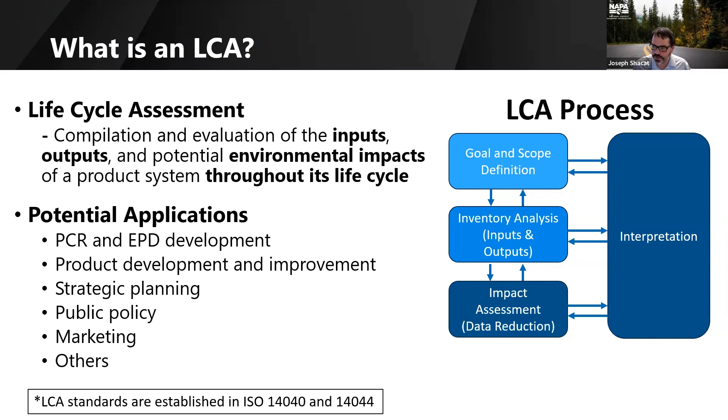So what is an EPD? The EPD is the Environmental Product Declaration. The best way to think of this is a standardized LCA report, where it's designed to enable comparisons between products that fulfill the same function. Now, remember my analogy there with the shoes? That was not an EPD because I really can't compare that pair of shoes' carbon footprint to some other pair of shoes' carbon footprint because it's not standardized, unless I'm looking at one pair of ASICS to another, for example. So that's one of the differences there.

EPDs also report a number of impact categories, not just your carbon footprint. So we'll get into that later on in this presentation. And EPDs are also independently verified. I didn't see anything in the ASICS methodology that showed that their calculations have any sort of verification. So that's an example of the differences that are out there. One key thing about comparing EPDs is you should not be comparing EPDs across different product categories for a lot of reasons. But as we go into this a little bit more, I think you'll understand why that's important.

So what is the PCR? The PCR is a set of product category rules. This essentially sets the standards, the rules, requirements, guidelines for developing EPDs for one or more product categories. So in our industry, we have two really key PCRs at this point in time. One is the core PCR for construction products and services. That covers all construction products and services. It's ISO 21930.

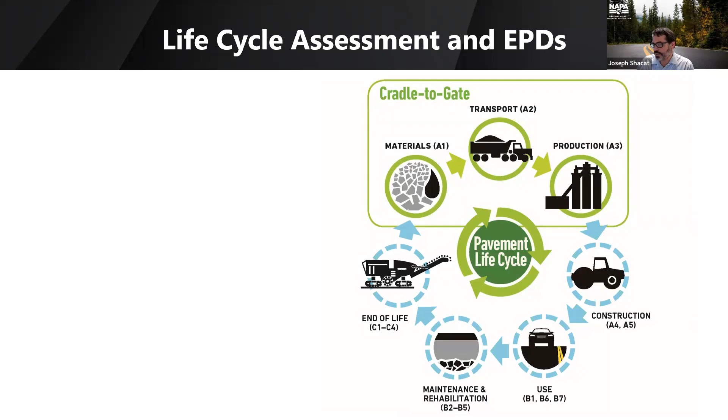Now, let's look at the life cycle assessment aspect of things. These are all the life cycle stages of an asphalt pavement, starting with raw materials, extraction and processing. This could be things like mining aggregates and crushing them, screening them, pulling petroleum out of the ground, refinery operations, asphalt binder terminal operations, all that sort of thing. That's all materials. Getting those materials to your plant, that's the A2 stage, and then plant operations is the A3 stage. These are the 3 stages that are included in an EPD with our Emerald Ecolabel software, because these are the 3 stages that mix producers really have control over, right?

Once it leaves the mix producer's plant, it could be sold FOB to a customer who's going to do their own paving operations. The producer often doesn't have control over what kind of road it's going to be on, how that pavement's designed, what the maintenance schedule is going to look like over the next 10 or 20 or 30 years, what's going to happen at the end of life. Those are often in the hands of the pavement owner or some other contractor.

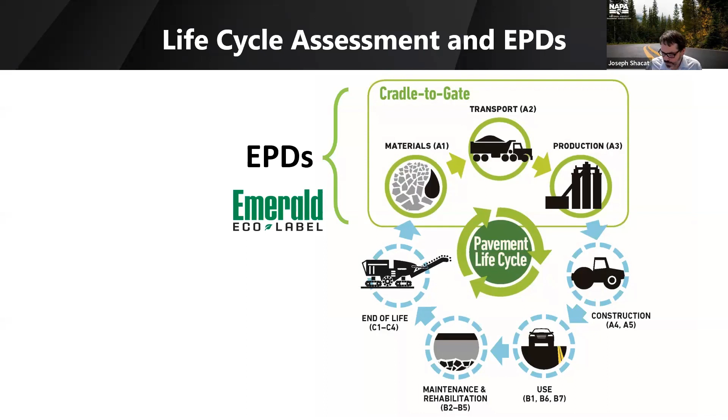If you want to look at those additional life cycle stages, you can conduct a life cycle assessment. You can use your EPD as a data source for that LCA, right? So it's a modular system. So if you're an agency and you want to look at the full life cycle, by collecting EPDs, you're getting really good data for those first 3 life cycle stages from your contractors, from your suppliers, and that sort of thing.

And then LCA Pave is a free, Excel-based software tool developed by the Federal Highway Administration that will do all these life cycle stages except for the use phase. So the vehicle fuel consumption and that sort of thing is not included in LCA Pave. So that's the full life cycle view of an LCA and an EPD.

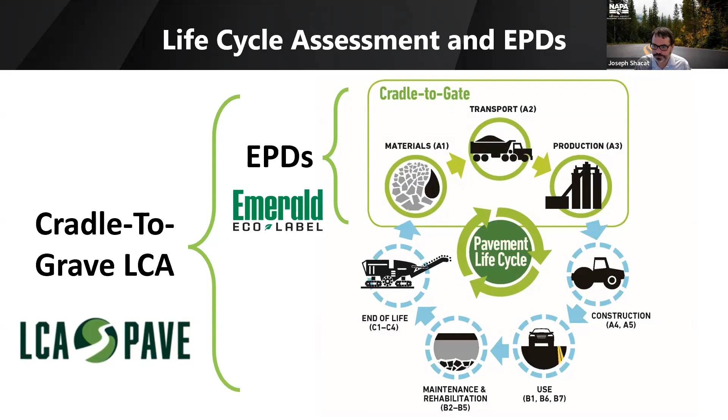So in our EPD program, we have a handful of really important components. One is our general program instructions. These are essentially the administrative rules for the program. We have an underlying life cycle assessment. So the PCR is telling you how to do an LCA to develop an EPD.

If you're going to write rules about how to do an LCA, you have to know what's important. What are the key parameters that matter? What are the things you can ignore? What are the upstream data sets you should be using? So that's all pulled from the underlying life cycle assessment. It's a really important document, which informs development of the PCR. And then once that PCR is finalized, we have a software program that lets mix producers pretty easily develop EPDs for asphalt mixtures that comply with the PCR for asphalt mixtures and all the other standards that PCR is compliant to as well. So that's the overall program in a nutshell.

Okay, so let's take a look at what's happening in the policy space, because this is going to inform why this is really becoming important today. I'm going to start this section with the results from a study that Oregon Department of Transportation commissioned a few years ago. They did ODOT's emissions inventory over a 4-year average, 2016 to 2019.

And they were looking at what are the agency's scope 1 emissions in green, so the direct emissions coming out of the agency's equipment, buildings like the furnace systems in buildings and that sort of thing. What are the scope 2 emissions? So the upstream electricity production for any electricity that the agency is using, and then the scope 3 are the direct or indirect emissions associated with contracted services and that sort of thing.

Now, what's interesting about this is for this particular agency, it's the only one I know who's done this and published it. The largest single contributor to that agency's carbon footprint was asphalt mix production. Now, if you're in the asphalt industry, you might be saying, well, boy, I know that asphalt has a much lower carbon footprint than concrete does, for example, Portland cement concrete. So how is asphalt the biggest contributor?

I'll tell you, a lot of this is because of the volume. This agency over those 4 years averaged about 1 million tons of asphalt use per year versus about 100,000 tons of concrete use per year. So that kind of shows you, the volume really matters. And in most agencies, most of their pavement network is asphalt. You're going to find a very similar result if you do this sort of analysis.

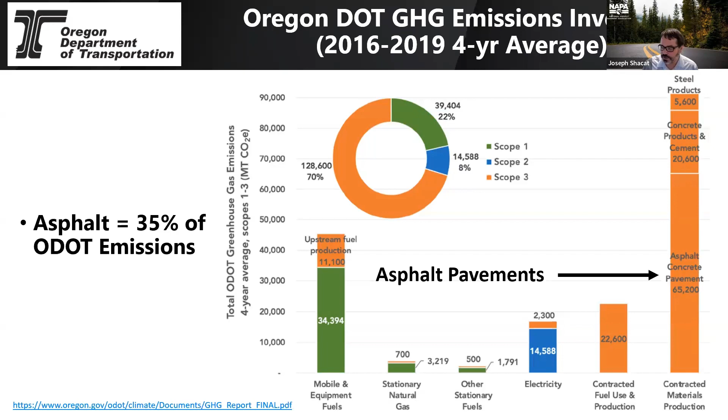Now, all these programs at the state level generally focus on, one, the contractor submitting EPDs to an agency, and there are thresholds typically for what size project is relevant and that sort of thing. And then the agency developing some sort of policy around what they're going to do with this information. Some of them, in Colorado for example, are very strict go, no go. We're going to establish a limit for this type of product. You have to be below that limit in order to qualify to provide services to the state agency, right?

I think that's personally the worst approach you could take for a whole bunch of reasons, which we don't need to get into today. Please hit me up afterwards. I'd be happy to talk your ear off about why that's a really kind of bad policy decision. But we're also seeing incentives and disincentives. And we're also seeing agencies that really just want to collect the data to do the sort of analysis, for example, that Oregon DOT did a couple of years ago, right? Just to understand where they are. So that's what those state policy initiatives look like.

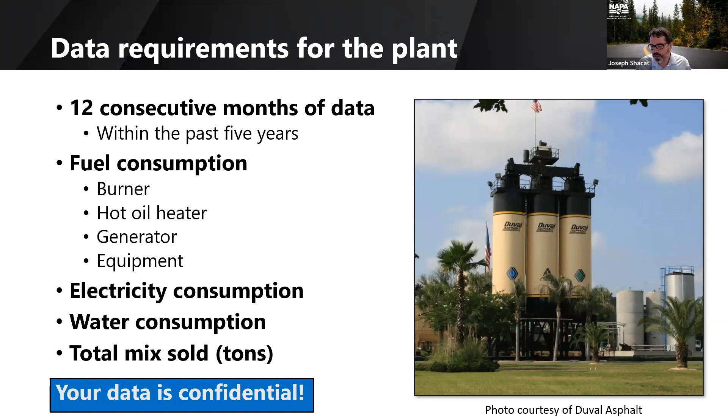So common questions that we get about plant data. I get these from users kind of all the time. First one will be like, okay, we have a plant that's located at a site that also has a quarry and a central maintenance facility and a ready mix plant, and we all share the same natural gas meter, or we all share the same electricity meter. How do we allocate between our plant and the other operations?

And ideally, you're going to be sub-metering your plant's natural gas, electricity, or other utilities. That doesn't always happen, right? So you have to come up with some way of understanding and estimating what that is. And you have to be able to document that. You have to be able to show your calculations, talk about your assumptions, what they are. If your data gets audited, you got to be able to defend the decisions you're making on this.

What if inside the plant, maybe I'm sub-metering the natural gas meter to my plant, but then I don't sub-meter the hot oil heater? I'll say this isn't really required. It's great if you do, but if you don't, you're just going to lump in your hot oil heater consumption with your burner fuel consumption, and that should be fine. It's not going to really affect any of the results.

Sometimes, when you're entering your plant data into the software, it'll give you an error message, a warning. It'll say, hey, your data for your burner fuel or for your electricity is outside of the expected range. What do I do? The first thing I'll say is go take a look at your input data and make sure the units are correct, right? And sometimes people will say, yeah, it looks like the units are correct. Sometimes they'll say, oh, no, there's a mistake on the bill. That's really not uncommon for utility bills to have wrong units.

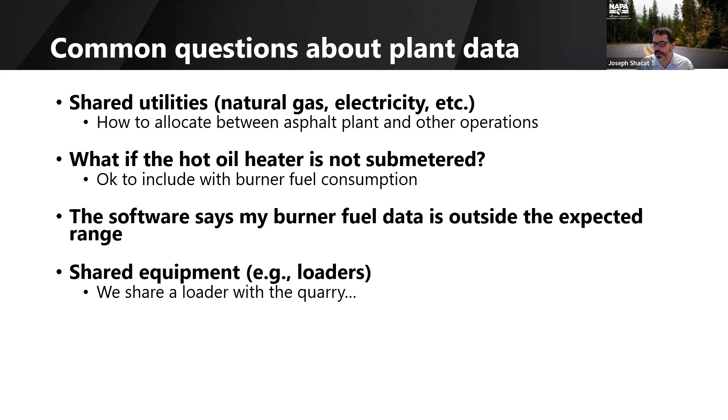Also on allocation, sometimes you'll share equipment between the plant and another operation on site, like a quarry or a ready mix plant, or equipment is going in and out of the plant and going to job sites and being swapped out. So you have to have a way to understand and estimate and document how you're making those estimates.

A really common question is there's no water meter. Maybe a plant has its own well, but they don't have a meter. Maybe they don't really control it. Maybe there's an on-site quarry and the quarry comes by every day, a couple times a day, with a water wagon and sprays down the roadways. You got to be able to estimate that. You have to know how much water they use in a given pass, and how many passes they do every time you operate. How many times do you operate per day?

So you have to put all those calculations together and document them, and that's what you're going to upload into the system for your documentation. And it's really important that you do this, because in the event that you get audited, you're going to have to be able to back up your claims here.

And so a lot of folks will do this by, I've seen it with internal memos from one department to another, or a memo to yourself that you put in the system that kind of goes through all of your calculations. I've seen it with spreadsheets. I've seen utility bills, like there's a spreadsheet where you got a summary, and then you have each month's data, utility bill as a PDF, kind of all wrapped up into one. So there's a lot of different ways to do this.

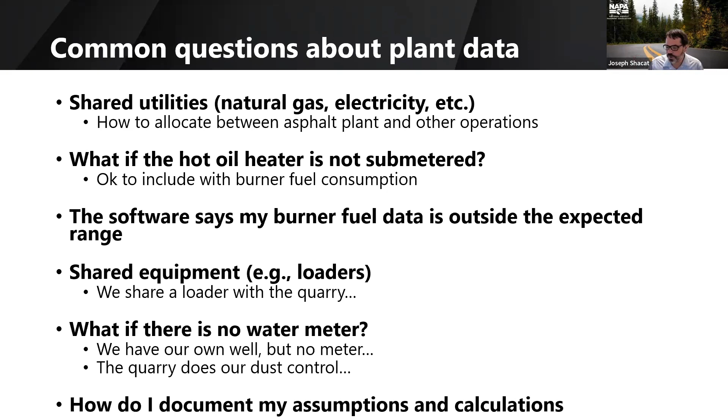So let's look at you've entered all your plant data, you got all that sorted out, and you say, okay, I want to do my additional benchmarking data, right? This is an additional data set. It's not required for EPDs, but if you want to participate in benchmarking, this is an additional data set that's required. So first of all, your benchmarking data has to match your 12-month data collection period.

We're going to be looking for how much RAP did you consume? What's the average RAP content of the mixes you produced? And what's the total amount of RAP you consumed during those 12 months? For your aggregates, what are the 2 most used quarries at this plant?

So for each of those 2 quarries, and maybe there's only one, if you're located inside a pit, for example, you might not use another aggregate supplier. How much did you use? How much aggregate, total quantity, and what are the transport distances and modes for getting that material from the quarry to your asphalt plant? Same thing for your asphalt binder. Really, for your most used binder supplier, what is the transport distance and mode?

Information about your plant. Is it a batch plant? Is it a parallel flow drum plant? Is it a counterflow drum plant? What's the rated capacity? What's the diameter of the drum? How many total operating hours did you have in a given year? If you don't have that, maybe you can estimate, well, we typically operate 6 hours a day, 5 days a week, 7 months out of the year, right? So you can give us that information so we can help estimate the production intensity.

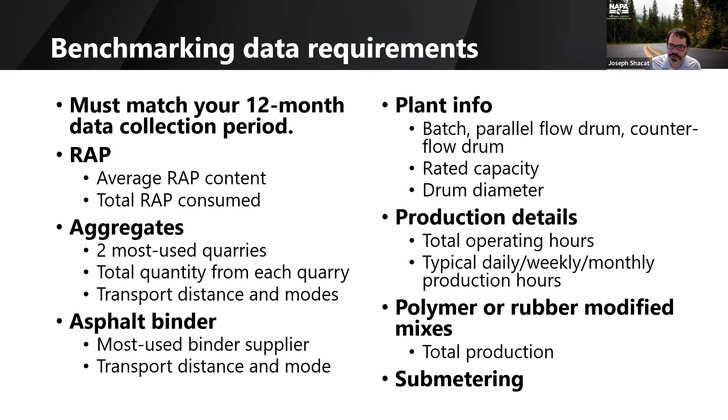So what's this benchmarking data going to be used for? Obviously, developing the industry averages for FHWA's grant program, right? But the other thing is for the Energy Star program, we'll talk a little bit more about this later on. US EPA's Energy Star program has an energy performance indicator tool that they're developing for the asphalt mix production industry. And once this is complete, this will be the basis for being able to get a plant certified by Energy Star as being an efficient plant in the US.

So once you submit your production data, you can create EPDs if you've purchased access, but you don't have to create EPDs to submit benchmarking data. So just to keep those two kind of separate. Let's talk about ingredients. In this part of the tool, you're going to create a library of materials and suppliers. These will be stored at the organizational level, so shared across all of your asphalt plants. For things like aggregates, binders, binder additives that are blended at the field, mix additives.

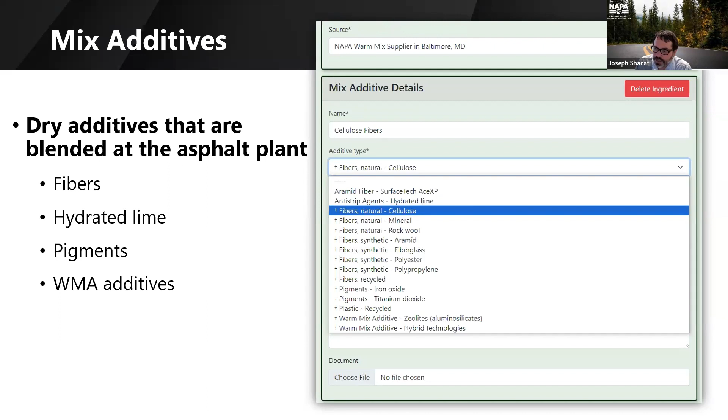And then the last piece on here is the mix additives. So these are things that are typically added dry, things like fibers. We've added hydrated lime here a second time as an anti-strip agent because some plants look at it differently. Some call it a mineral filler, some call it an anti-strip agent. We wanted to give people the option to add it where it's more natural for their mix design approach. This is going to be things like your fibers, your pigments, some of the warm mix additives that are not liquid additives.

So let's talk now about the mixes. You've created all your library of ingredients, and you can always add to that. Once you've done all this work and you've created your first couple mixes, most users find it's about 10 to 15 minutes to create a new mix. The question that I often get is, boy, that seems like a lot of time for each mix. And then I ask, how many labor hours go into creating a new mix design for your plant? And I hear anywhere from 40 to 80 to 100 labor hours.

So you could give your mix design technician permissions and train them on how to enter this data. You're going to add 10 to 15 minutes to their workflow, and it's not going to be a huge impact. So what are the data requirements for the mix designs? We're going to look at what kind of mix this is, whose agency specification it is, so you can identify this mix. And then how much of each of these materials is in your mix by weight of total mix? We'll talk about that in a second.

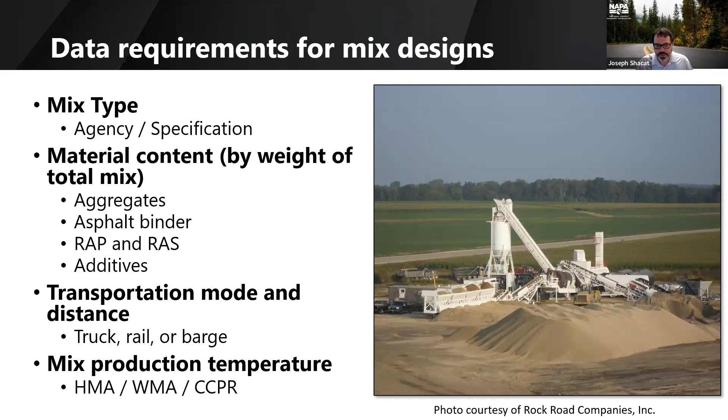How are each of these materials getting to your plant? And then we want to know your mix production temperature. That's really just for transparency and disclosure. We don't change any of your EPD results based on your mix production temperature, but we do disclose what that is. Are you calling it a hot mix, a warm mix, cold central plant recycled mix?

So on these materials, most people, when they do their mix designs, and most agencies require this, add up all your aggregates and RAP and RAS to 100%. And then the binder content is sort of added on top of that, so you end up with like 104% or 105, whatever that might be. Sometimes the binder content is the total binder content, and the mix design doesn't show the virgin binder content. So that's a really important piece.

We need to know what's the virgin binder content, not the total binder content. And then you have additives. Additives might be dosed as a percentage of the virgin binder or the total binder or the total mix. And I've seen where additives aren't actually included in the mix design. I specifically have seen this with SMA mixes where they don't include the cellulose fibers in the mix design, even though they're putting it in the mix, right? It's not in the mix design.

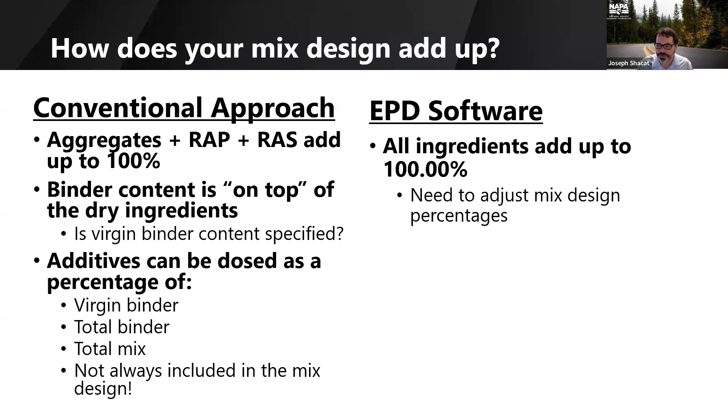So you've got to be careful here to make sure that you're accounting for everything that's going into the mix itself at the plant. Now in the EPD software, we need everything to add up to 100.00%. So we have to often adjust the mix design percentages to make everything hit 100.00%. So we have tools to help you do that.

In the EPD software or in the data gathering spreadsheet, we have two mix forms, mix form A and mix form B. So if you've already done that math and you've got everything adding up to 100%, you'll use mix form A. If you haven't done that, right? If your dry aggregates, your dry ingredients add up to 100%, you're going to use mix form B. You'll see you have your data inputs and then those two columns on the left, where we actually do some calculations to help pull all that down to add up to 100.00%. So we have that for you as a tool to help you do those calculations.

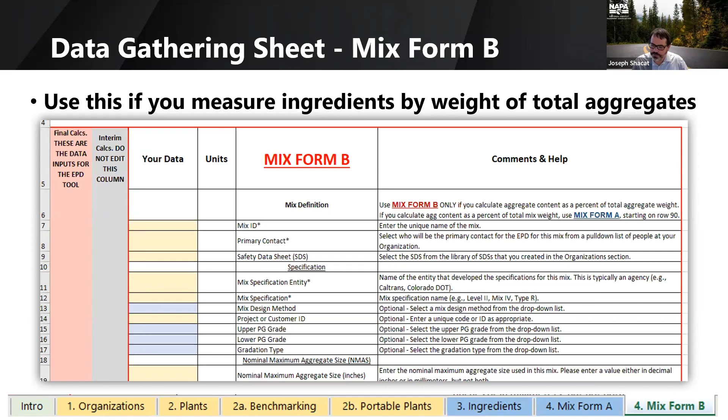Regardless, if you're the environmental person or the salesperson and you don't really understand mix design, make sure you walk through this with your QC expert, because they're going to be able to understand what we're looking for here. The math isn't that hard, but it can be really, really confusing. It's simple math, but it's confusing conceptually sometimes. So please make sure you work with your QC expert on making sure you get these calculations correct.

So once you've developed your mixes, you can view your EPD, you can publish your EPD. And as I mentioned earlier, if you have a data gap, if that data gap is more than 1% of your total mix, it won't even let you view the EPD because we've exceeded that threshold, right? You cannot develop an EPD if that data gap is more than 1% of the mix. So let's take a look at how to view the EPD and how to read the EPD.

What's it all mean? Time check, and I think we're good.

Yeah, we're good. Where can I find published EPDs? The best place to find published EPDs is at asphaltepd.org/published. That is the real-time, most up-to-date compendium of EPDs for asphalt mixtures. We have other program documents you can find at asphaltpavement.org/EPD. That's where we have copies of the PCR, the underlying life cycle assessment, a whole bunch of other documents, the training software, all the training webinars. Everything else is at that page. So those two websites are really the two that you should be looking at.

So you go and click into and open an EPD. You're going to find the company information, right? The cover page. Company information at the top, plant information: where's this plant located? Is it portable or is it stationary? That'll show up now. What is this product? What are you calling this mix? That's your company's own mix name for this mix.

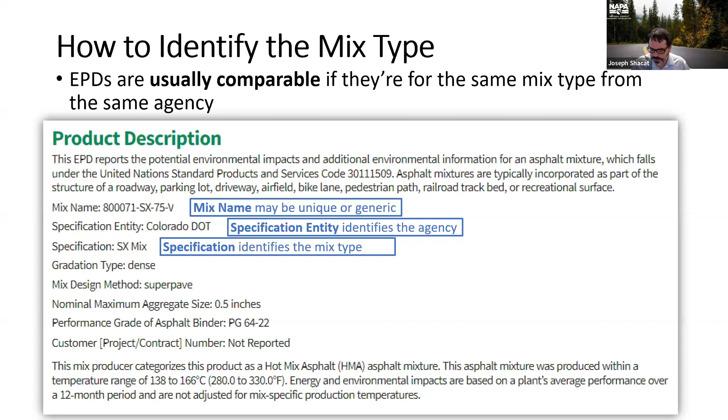And one thing about our EPD program, and this is specified in the PCR, is all the EPDs expire when the PCR expires, which is March 31 of 2027. So if you create a new EPD on March 1st of 2027, that EPD will expire 1 month later, right? You have the declaration number. Each EPD has a unique declaration number and a unique version number, right? And a unique URL for each version of each EPD. That URL is only accessible publicly once you've published the EPD. Before you publish it, that's not accessible by anyone unless you have permissions to view the data for that plant.

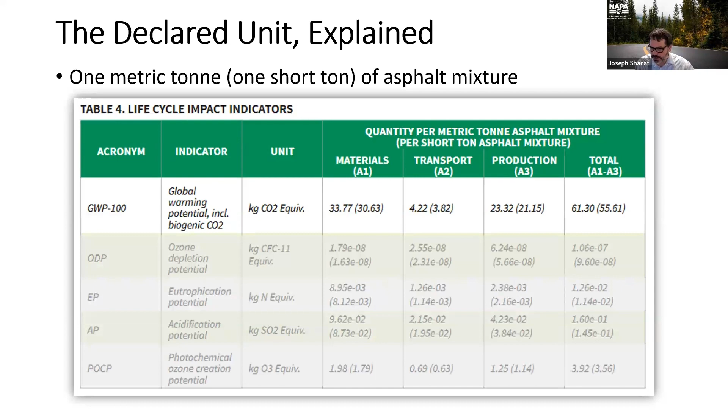So just drilling into this GWP number, I'm just zooming into this area here. We've got the A1 materials, A2 transportation, and A3 production, the total. And in this particular example, this mix's GWP would be 61.3 kilograms of CO2 per metric ton or 55.6 per short ton. So that's how you would read that number.

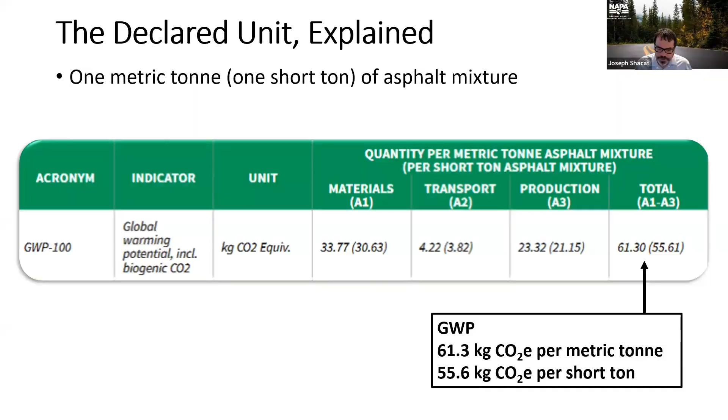Okay, so now you've done all this work to develop EPDs, you understand how to read them, you understand what you're looking at. What are the things that I can do to help my plant and my mixes reduce emissions if I'm going to start down this path of decarbonization? I see that I've got agencies that want to provide incentives for being a low carbon mix. How do I get there? How do I set up these goals?

And I often can save money by doing this as well, by the way. So looking at the EPD tool, we have a whole set of tools in the EPD software under this program called the Optimizer. The Optimizer lets you easily compare two of your own mixes to each other, side by side, just really easily put them side by side and look at them.

You're going to see more granular analysis. So not just A1, A2, and A3, but each unit process or individual material, you're going to see all that data. It's also a sandbox. It lets you create variants of your plant to say, hey, what happens if I can reduce my burner fuel consumption by 10%, right? Let's create a variant that does that.

What happens if I decrease my electricity consumption? I'm going to install some VFDs and that sort of thing. How does that affect my EPD results? So you can do that and just very quickly see how that affects things.

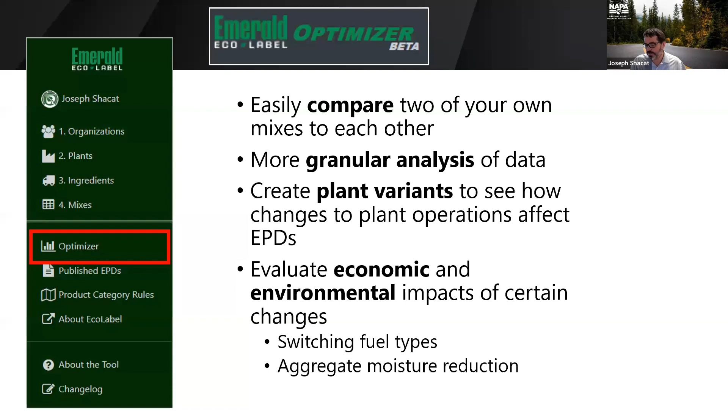And we have a couple of pre-configured tools to look at both the economic and environmental impacts of switching your fuel type for your burner, as well as reducing aggregate moisture. Really cool tools integrated with all of your plant data that will help you understand the cost and emissions reduction potentials. This is just one of the outputs of the Optimizer.

This is that side-by-side view of, in this case, two different scenarios for the plant. They're both using 20% RAP, but the one on the right is my conventional one that uses natural gas as a burner fuel. And the one on the left is a variant where I said, what if I was running diesel fuel here?

And you can see in this lower portion, where it says production on both sides, left and right, it says diesel burner, natural gas burner. The diesel is much bigger, much taller than the natural gas. That affects the total EPD results. In this particular example, it went from 38.3 kilograms to 46.8 kilograms, right?

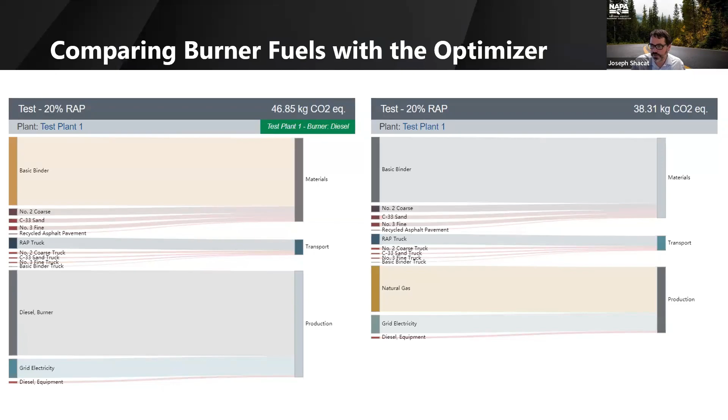So really easy to just compare scenarios. You can look at two different mixes this way, two different plant variants, two different plants, all that sort of thing. Really, really cool stuff in the Optimizer.

The other thing I would say is please participate in benchmarking, right? We said this before, I'll say it again. Please go do this training webinar. If you're a mix producer, go in there, do your benchmarking. You've got another month or so to do that over the holidays. Things are quiet. Maybe you can start collecting some of this data. I do anticipate we're going to extend that deadline, but I don't know how long it's going to be extended for, but please plan to do this.

The other thing I want to mention is, almost 2 years ago, NAPA announced the Road Forward. This is our vision for the industry, really member-driven, for achieving net zero carbon emissions for the asphalt pavement industry by 2050. So really an important initiative that impacts almost every single thing that NAPA does today.

Under the Road Forward, we've published already a number of documents. These are just a few of them. One of these on the left here, QIP 132, Production Strategies for Saving Money and Reducing Emissions. This was written by TJ Young. He's really one of the foremost experts on asphalt plant operations and efficiency and reducing costs and reducing emissions. This report should be read by every single mix producer; for every single plant operator it is mandatory reading.